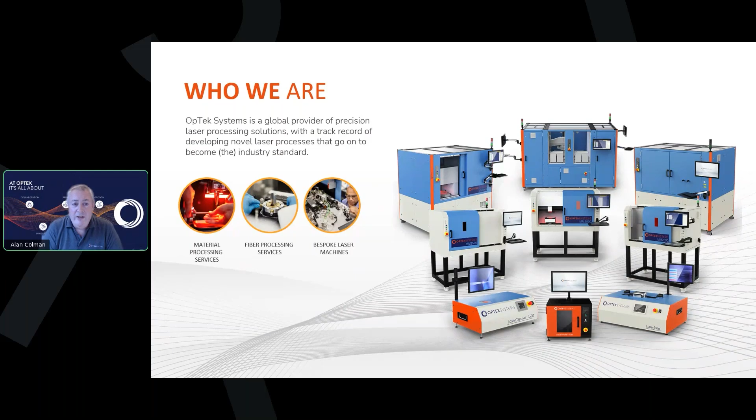Today, we're diving into laser processing of FAUs, fiber optic array units, and I'm delighted to introduce our speaker, my colleague Duane Dinkel, CTO at OpTek Systems. Duane will walk you through some of our most exciting advances and capabilities in this space, and I'll rejoin you at the end for the question and answer session. So, without further ado, over to you, Duane.

Fantastic. Appreciate the kind introduction, Alan. So we're going to spend a couple of minutes talking about what we do, OpTek's background, what we're good at, the business flow, and then we're going to dive right into FAUs. So I hope this is beneficial and enjoyable for all.

So OpTek's fiber business consists of contract manufacturing and equipment builds. The contract manufacturing is done out of Greenville, South Carolina, and Dongguan, China. Abingdon, UK does some contract manufacturing as well. All of our equipment builds are done out of Abingdon. They're shipped all over the world. We have hundreds of systems in the field that are processing optical fibers.

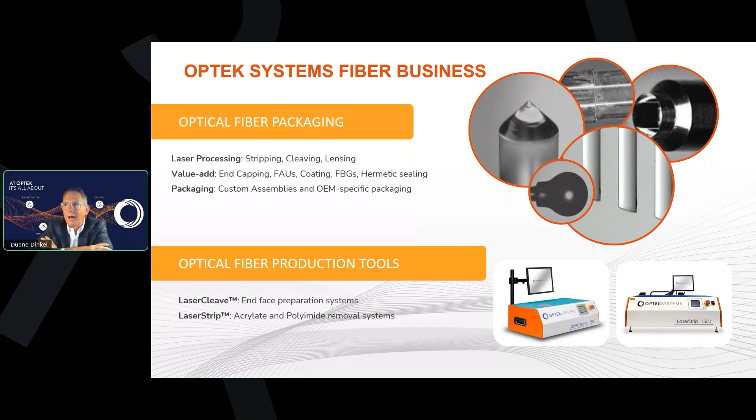Our fiber processing brands are Laser Cleave, these are cleaving and lensing systems, laser-based, and Laser Strip, these are systems for removing buffer. So OpTek's core competency, I guess, goes back 20 years ago. We were building lensing machines, and these machines were basically modifying the tips of optical fiber, could be single mode or multi-mode, in order to couple the fibers to active and passive devices.

We got pretty good at that. Throughout the 25 years, we can manipulate spot size, we can shift waist location. So these systems were ideal for preparing fibers for free space, receiving and transmission against active devices. So again, the core competence is laser lensing. That got us into laser cleaving. And then over the years, we developed various value add capabilities. We got into hermetic sealing, where we're using glass frits and metallic solders for creating hermetic seals for feedthroughs.

Most of that work was done through induction soldering. We then got into end capping in kind of a big way, taking optical fibers, attaching coreless fiber or graded index multimode fibers, cleaved to a quarter pitch to achieve collimation or manipulation of numerical aperture or mode field diameter. So end capping remains a big part of our business today.

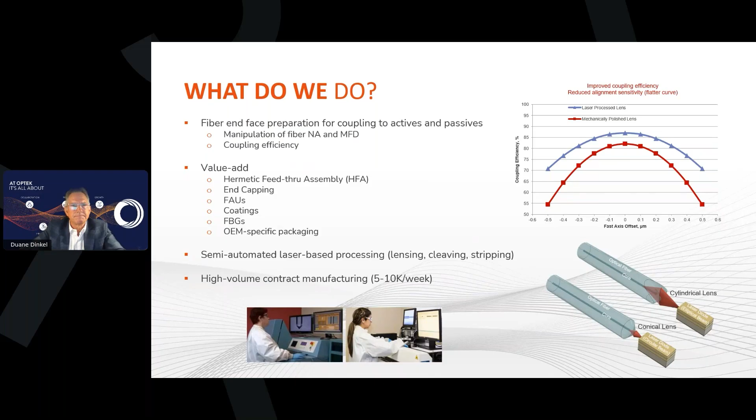So OpTek relies heavily on novel processing. Central is going to be laser processing. It's non-contact. The processes are operator independent, meaning operator training, technician training is easy, and we can run product across 24 hours without downtime. The non-invasive laser processing also provides high reliability.

Probably most important, it's design enabling. We can achieve designs on end faces that you really can't achieve mechanically. So we take a lot of pride in that. On the laser end face preparation, we do conical lensing. It's ideal for LEDs and any device that requires a circular far field.

We make cylindrical and biconic lenses, which are great for elliptical profiles that you can find in DFB-based diodes. We manufacture ball lenses. The ball lenses are great for rapid divergence or convergence, as well as for collimation. And then, our bread and butter is flat and angle cleaves.

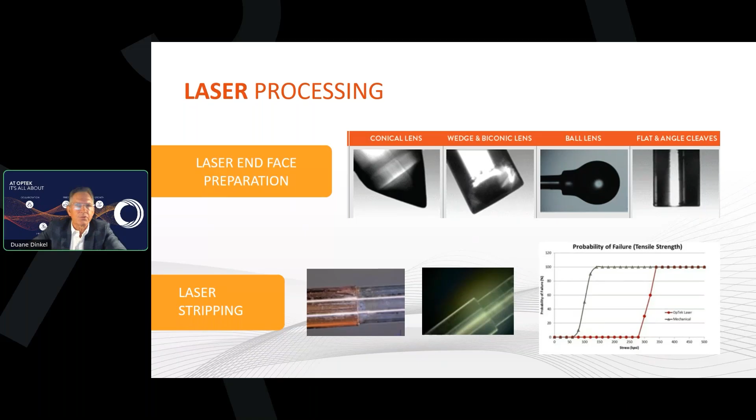Still talking about kind of who we are. Our toolbox consists of hermetic feed-throughs. These are, again, glass frits, metallic solders that are going to be induction soldered into various ferrules, and that is going to be inserted and soldered into our customers' snouts. We do a lot of end capping. The end capping controls energy densities. We can achieve collimation through quarter pitch GRIN attachment.

We do a lot of PM alignment. A lot of the product that goes through our doors is going to be polarization maintaining, and so we're quite proficient at maintaining strong PER end to end. We do have patents in high temperature probes, 700 degrees and above. These are comprised of proprietary composite chemistries as well as sapphire. Again, most of the high temperature work has some sort of a patent behind it.

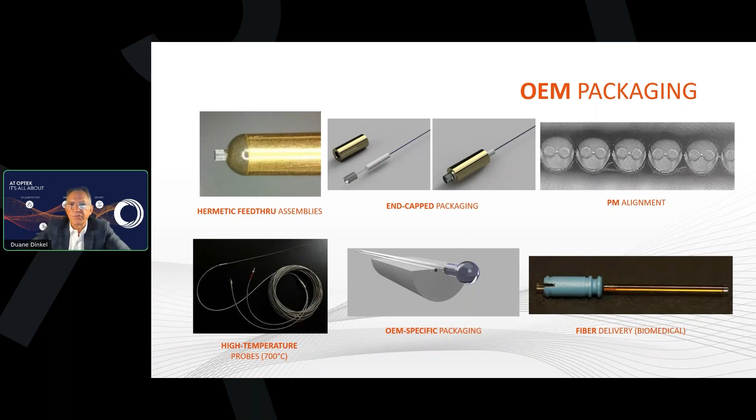We make OEM specific packages. The device that you see here is basically a transmitting single mode fiber and a ball lens for receiving. That's just one of hundreds or thousands of OEM specific packages that we have. Fiber delivery is a big part of what we do for everything from lithotripsy and biomedical to industrial applications. So fiber delivery packages are a strong suit for OpTek.

All right, so diving into FAUs, the spirit here is that most of the audience, I think, has some sort of acquaintance with FAUs. This is not a PhD level dissertation by any means. But it might be a little bit above 101. The central theme of the webinar is going to be manufacturing.

So bear with us. So FAUs are 1 or 2 dimensional arrays of optical fiber that are seated in a substrate. The industry kind of settles on silicon or silica or borosilicate diced substrates. They can also be used in flexible circuits. FAUs aren't new. They've been around for 30 plus years in the telecom industry. They were an enabler for DWDM manipulation in telecom architectures. Those were and are still called PLCs, planar lightwave circuits, and arrayed waveguides.

They're used throughout multiple industries outside of telecom. You're going to find them in guidance systems and beam combining and aerospace applications. They're used today in quantum computing. On the medical side, they're used in beam delivery, and you'll also find them in sensing. So FAUs have been around for 30 plus years. So why is OpTek even interested? Why are you attending this? So in the world of AI, FAUs are kind of finding renewed growth.

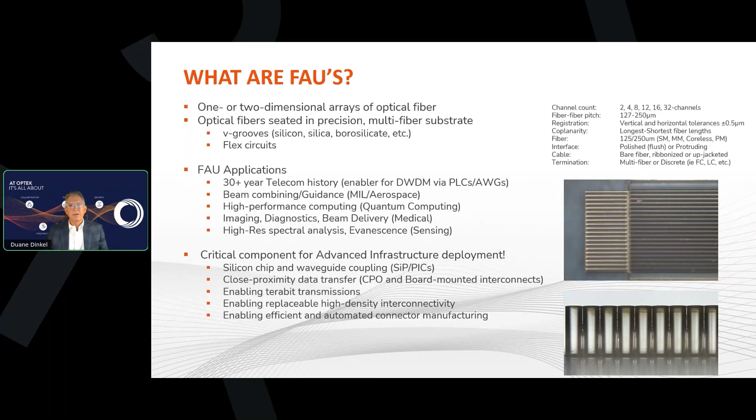So the configuration of an FAU, how it mounts or interfaces to the waveguide, is critical. And unfortunately, it's far from standardized. Up to this point, historically, PLCs, AWGs, these are all flush polished with the idea of butt coupling directly against a waveguide. That's the industry standard that exists de facto. These are interfaced typically with index matching epoxies, and that's kind of the constraint today.

So OpTek got into FAU production 5 years ago with protruding fibers. We're laser cleaving the tips of protruding fiber. They can be direct mounted. You can still epoxy them for flush mounts, but they also accommodate free space transmission. Then we started getting into, well, we can't rely on the natural NA of the fiber to get good coupling into the waveguide. So we got into lens production, where we're actually creating lenses on the ends of the FAUs. Again, ideal for free space, ideal for spot and waist manipulation, so you can get better coupling into the waveguide.

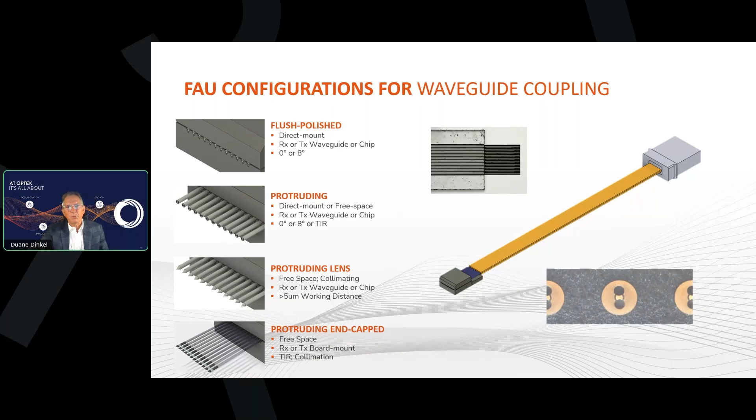So much of the previous introduction is going to apply to our FAU manufacturing. We're relying heavily on laser processing. Most of our FAUs are hermetically sealed at some level. There's significant end capping at the FAU level. We're even finding fiber Bragg gratings are now being incorporated into FAUs, and of course coatings, where back reflection or mirror coating demands are required. So we do have dedicated manufacturing centers in-house to handle all of this FAU production.

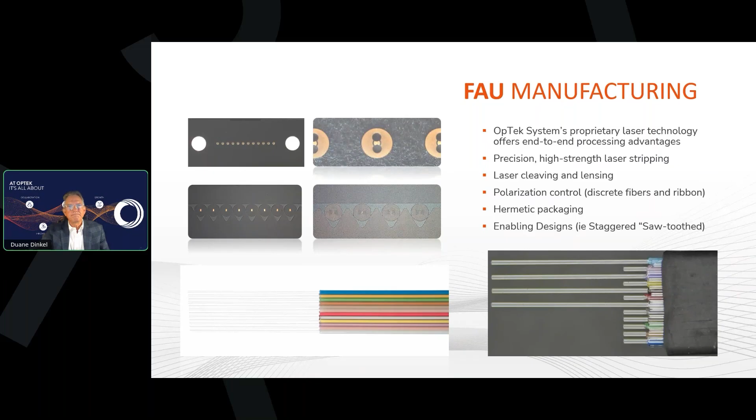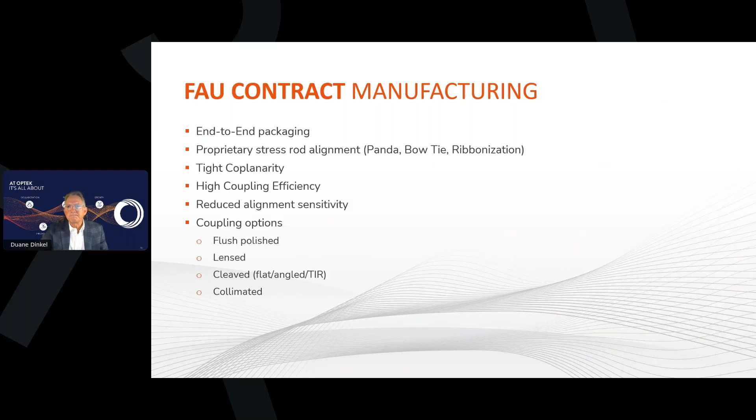Okay, talking a little bit about our manufacturing flow. We already talked about polarization maintaining fiber. Virtually every FAU that we manufacture today has a leg or multiple legs that are polarization maintaining. Stress rod alignment is critical. We've struggled for years with the polarization maintaining aspect, tweaking, aligning under magnification. And we've really developed a pretty elegant solution for the stress rod alignment. Once aligned, that can be fed into ribbonization processes to lock the alignment into place.

We heavily utilize laser stripping. Precision stripping presents a clean fiber that can be dropped and seated into V-grooves. The fibers are lensed, they're laser cleaved, and then characterized.

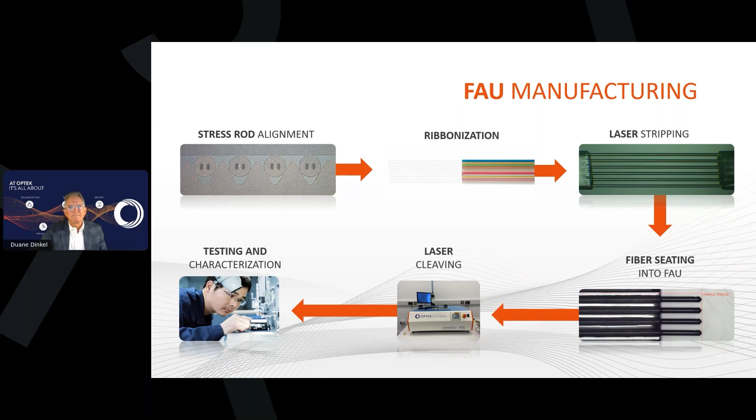So taking a little bit of a step into some of our manufacturing details. We do start with the stress rod orientation. We believe that that's one of the most fundamental keys in today's AI-driven FAU demand. So we start with the receptacle.

What I have illustrated here are just simple MTPs, but you've got a receptacle that's going to receive a fiber, and through a combination of laser processing and alignment techniques, we're able to take an unoriented fiber at the multi-fiber level, orient the fibers, lock them into place in the receptacle, and really once that's locked into place end to end on the assembly, then you're really off and running.

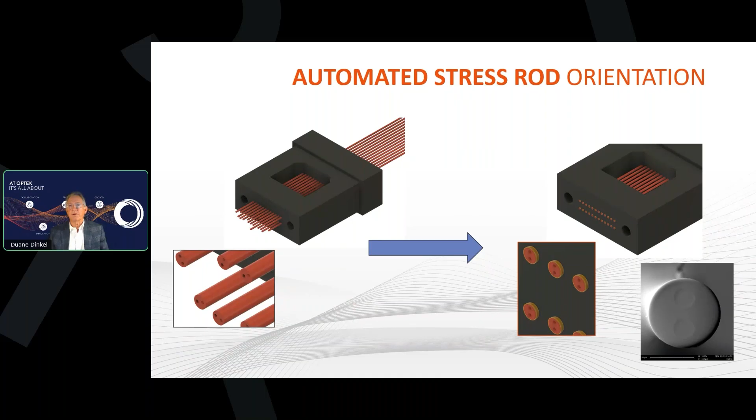These receptacles, if it's an MTP, it's more than likely going to be utilized in the application. If it's an in-house receptacle, it's sacrificial. It'll be lopped off later on down the road. But at this point, it's holding the fibers from a completely unoriented PM state to a fully oriented state. It could be in the slow axis, it can be in the fast axis, whatever's required. It can even be in a 45-degree axis.

So once the fibers are oriented, they're then ribbonized end to end. Again, both sides of the structure are going to be PM aligned. In reality, maybe half the fibers are PM, half the fibers are not. In some applications, 100% of the fibers are PM. So it's pretty much all over the place.

But this is key. Once the fibers are stress rod aligned, once they're ribbonized, then you've completely demystified FAU production. At this point, you can process the fibers, drop them into V grooves. If you need to drop them into an MTP, you can do that. So it really demystifies the entire FAU production flow.

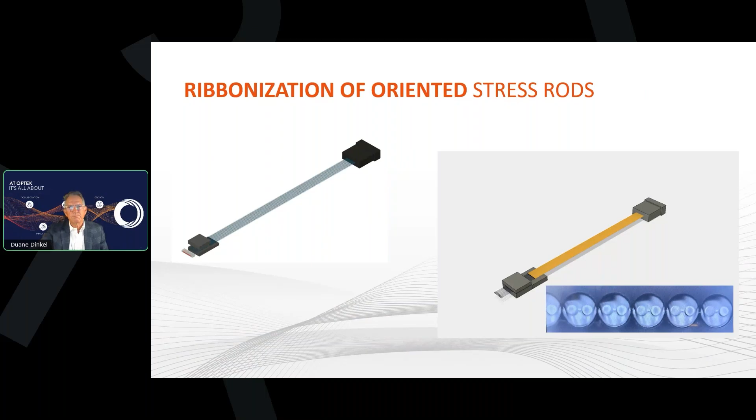So following the ribbonization, OpTek uses laser stripping techniques. Laser stripping gives us nice, strong fibers. It's an ultra clean fiber. It does not have to be run through an ultrasonic bath or swiped with IPA. All of those things are just going to add to the embrittlement of the fiber. At this point, we're able to strip to tolerances within several microns. So it's a very high precision, very rapid process, our laser stripping.

So once the fibers are stripped, they're clean, they have high tensile strength, and they're just simply dropped down into the V grooves. We use multiple epoxy chemistries for the lid attachment, for the landing. If they're polarization maintaining fibers, then we're using low stress epoxies. These are all just standard industry knowns. I'm sure you're employing something similar. The fibers at this point will be protruding 1 to 2 millimeters beyond the V groove face for subsequent cleaving.

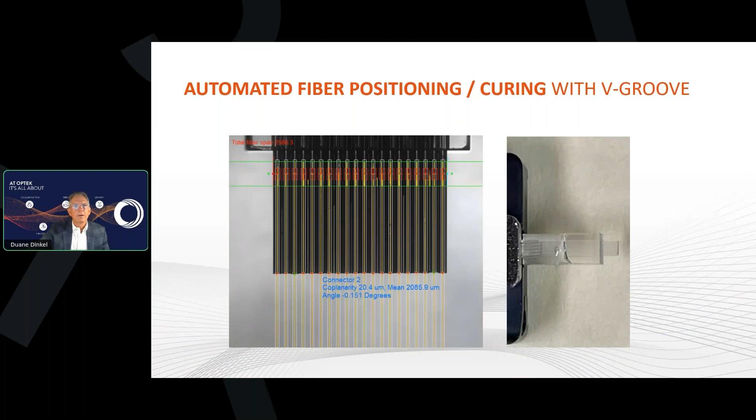So then we use automated cleaving, laser-based cleaving, to cut down to the desired protrusion. It may be 258 microns, it may be 900 microns, it's all over the place, nothing standard. If we are going to flush polish, we're going to cleave as close to the silica V groove face as we can, in the spirit of minimizing our polishing steps. If the fibers are lensed or end capped, it's a slightly different process. During the seating operation, the fibers are precisely aligned to within 5 microns.

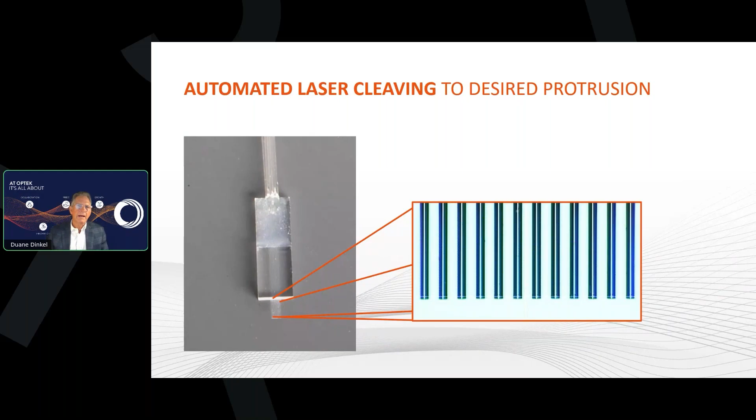So at this point, the fibers are being carried through the entire process on a common fixture. In the world of fiber manufacturing, handling needs to be minimized. You also want to be as gentle on the fibers as you can. So once the fiber is fixtured, you really don't want to take it out of the fixture. So going all the way back to the PM alignment stage, we're sharing the same fixture. And when it gets up to the final inspection step, the same fixture is used.

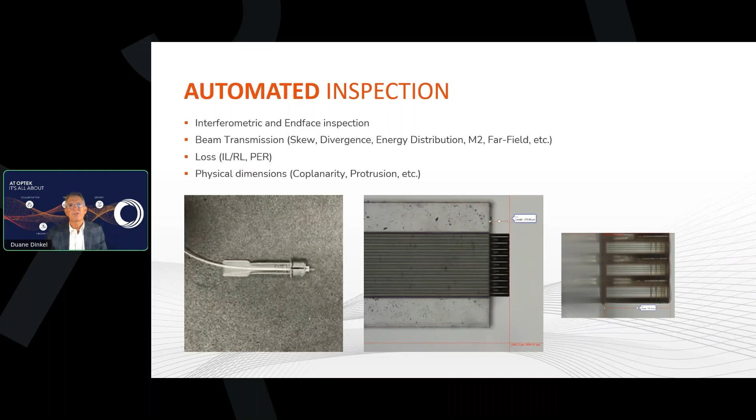Introduce the fibers into interferometry or visual endface inspection. We're also monitoring beam transmission, skew, unnecessary divergence. These are all necessary to quantify to avoid excessive losses. Insertion loss, return loss, polarization extinction ratio, these are all monitored, as well as the physical dimensions.

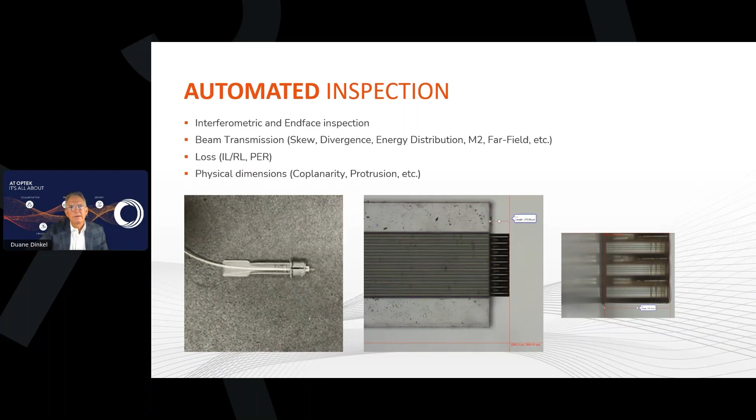So that's kind of a walkthrough, simplification of our process. Looking at the next steps. So V-groove pitch today is really designed around 125 micron fibers with 250 micron buffers. So your current pitches are 250 micron to 127 micron. With the support of our sister company, FiberCore, we are aggressively pursuing 80 micron pitched V-grooves. We believe that this is going to be well received into the marketplace. Again, it's one step further into the miniaturization demands of AI.

And today our manufacturing is limited to one-dimensional arrays. However, the process will also accommodate two-dimensional arrays. So those are steps that we're moving into.

So as I mentioned, chip production hasn't standardized designs and architectures. Some chips are butt coupled, some require free space transmission. Some of the fibers are PM, not all of the fibers are PM. It's kind of all over the place. Even some of the interfaces are staggered, some are linear. So there's designs out there that are kind of all over the place.

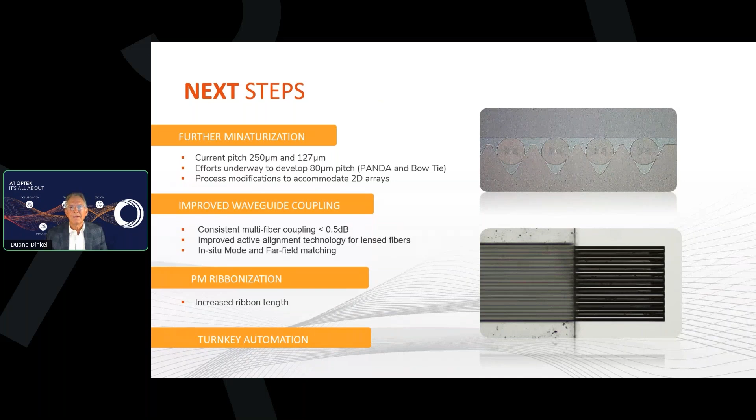So the first one here, great talk. What's the type of laser used for stripping and cleaving? Yeah, Eric, we don't get into too much detail on the laser and the optics. Truth be told, we do use a lot of different lasers. Some lasers work well at the ablation level, some work well at the thermal level. I will tell you that our cleaving systems are a combination of ablation and the thermal component, and that stays true even for the stripping. But it's hard to give a direct answer on the laser that we use, because we do use different laser systems.

Fantastic, thank you. Another question just came in. How does OpTek's semi-automated fiber laydown process improve repeatability or reduce alignment time compared to manual methods, Duane? Yeah, good question. So we've been tinkering with FAUs for 5 years. Our approach historically was fairly manual. Then we started getting into the PM requirements, and it was a real struggle aligning each fiber under magnification, locking it into place with epoxy, moving to the next fiber, et cetera.